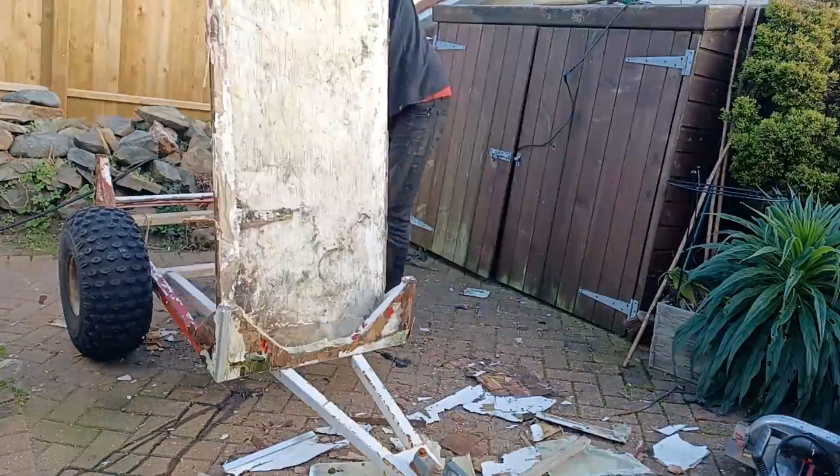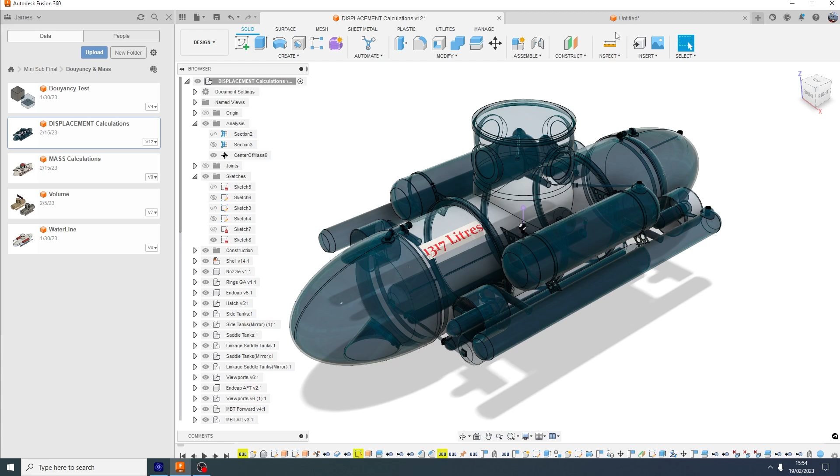And I've done one extra thing in here as well. I've recalculated the displacement calculation because it wasn't quite right, and I shall explain why. With this fantastic demonstration model that I've done, this is solid, this is solid. It doesn't matter what the sizes are, and you can see if I've done a section analysis there.

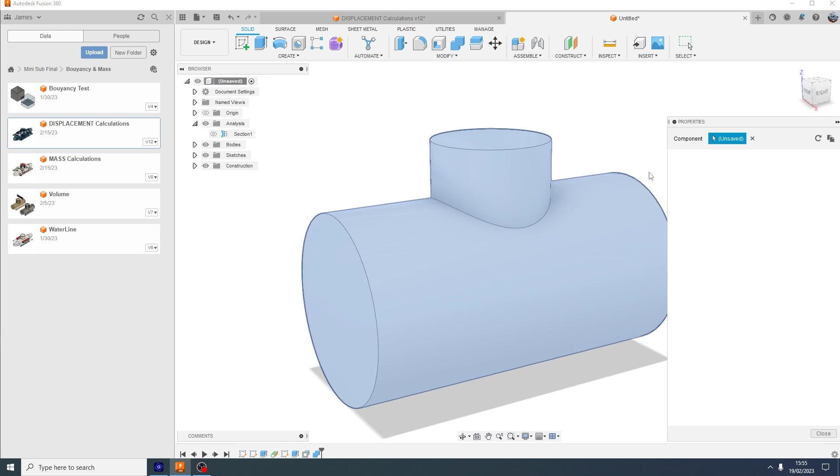There's two items. So if I do a properties of that, my volume is 5.361 times 10 to the 5, about 5.361. Okay, now if I combine the two and do the same again, 4.578. Okay, so it's not as much.

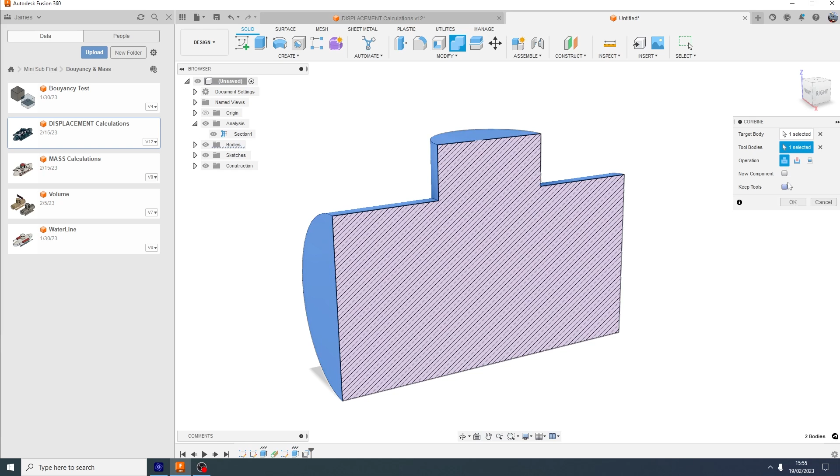Now it's pretty obvious, but if we do the section, it's calculating the whole volume of this and the whole volume of that and adding them together, whereas when they're joined together, you're not getting as much. It's really obvious when you look at it now, but I didn't actually think about that.

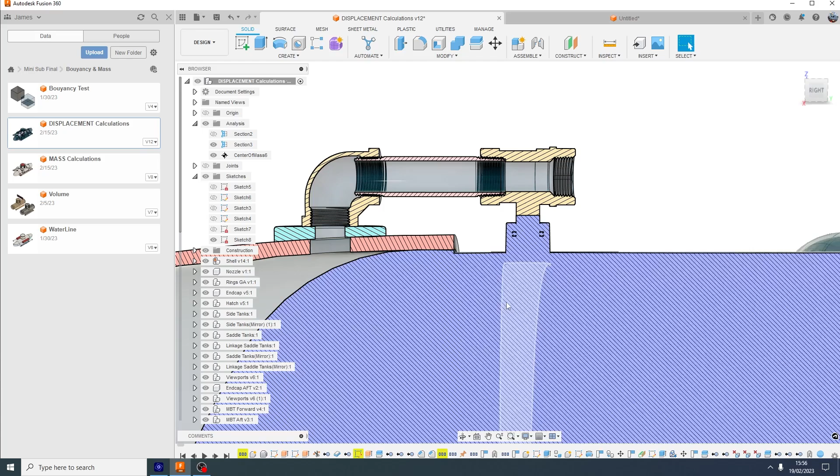So I've gone through and I've made sure that everything in here is exactly as per that, so there's nothing sticking out that would be in a solid piece. Like, for example, zooming in there on that valve, you can see the interior of the hull penetrator is just all one big solid thing now. So that makes that correct, hopefully.

And on top of that, I recalculated this BG there, which is now slightly less. So we've got a BG. This is buoyancy, and G for gravity down at the bottom, and that is a distance of 88 millimeters.

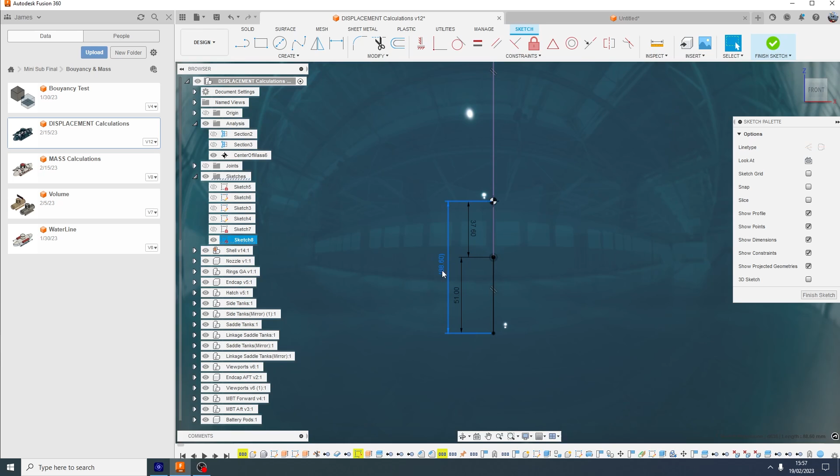So it's not as much as it had been before, but that's because I've not taken into account the way it was calculating those volumes. But now I've done it again, so this I think is a much more accurate one. So that's still well within the 51 millimeters as specified by ABS, and I get a displacement now of 1317 liters.